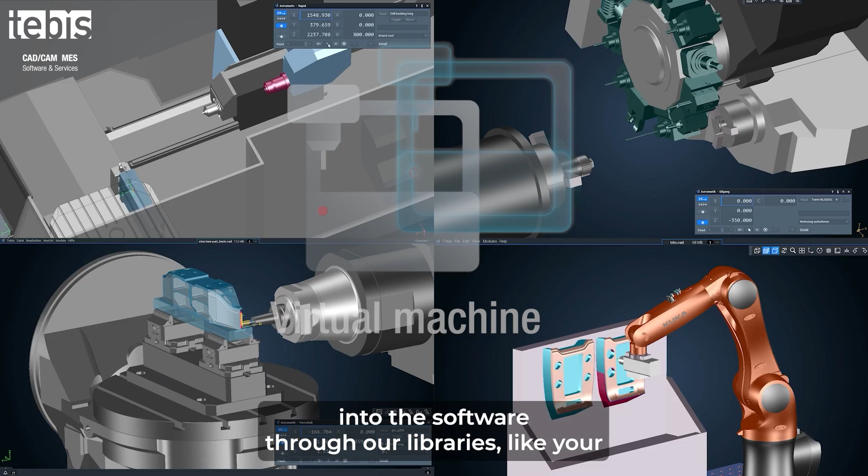Okay, so the digital twin, most people think of it as just being about machines. And of course this is a very big part of it, but it's also about the whole machining environment in Tebis, where we build in your working practices through our libraries, like your cutting tools with your speeds, feeds, ramping feed rates, plunging feed rates, step over feed rates, maybe recommended step overs, depths of cut, and your cooling. All this is built into the tool library. Could be your clamping devices, what machines you've got, even your processors for machining certain types of job through automation and templates.

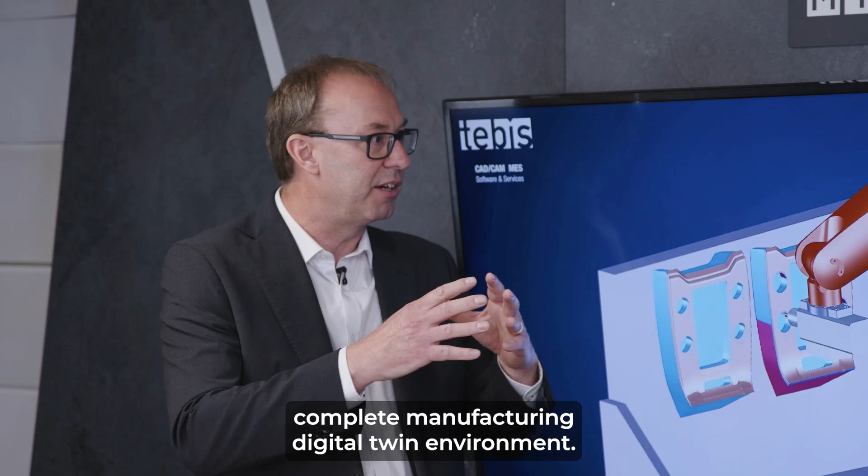All of these can be built into the software to give you that complete manufacturing digital twin environment. But of course today we're talking about the digital twin of the virtual machine. In Tebis, we're a machine-orientated program, and the virtual machine is a really important part of this process.

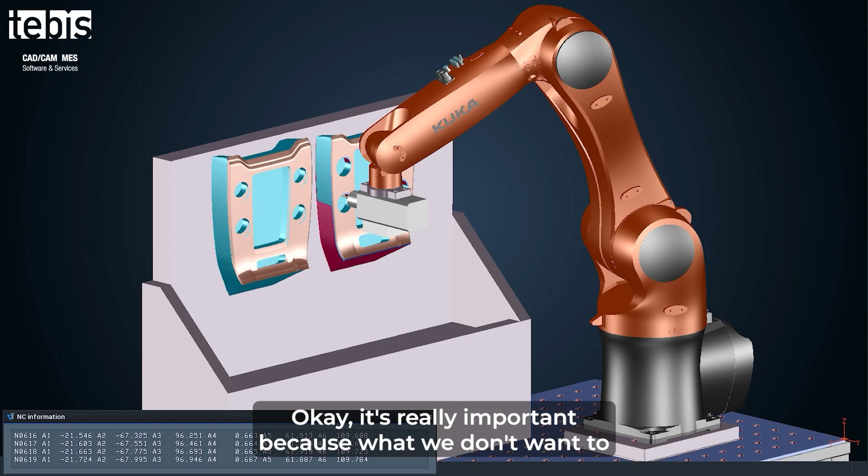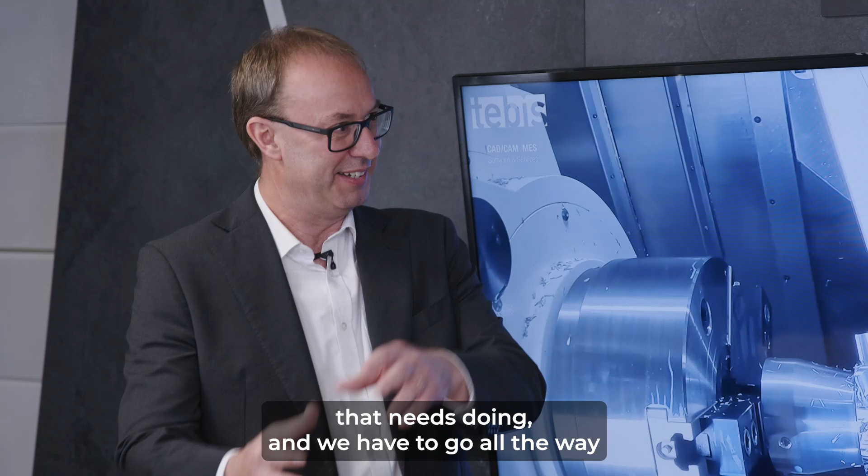So, Paul, why is all this so important? Okay, it's really important because what we don't want is a situation where we program a job and then find out afterwards that when I try to run this on the machine, the machine kinematics don't support the operation I'm doing. Or we find there's a rework loop that needs doing, and we have to go all the way back to the CAM side of things and restart it all again.

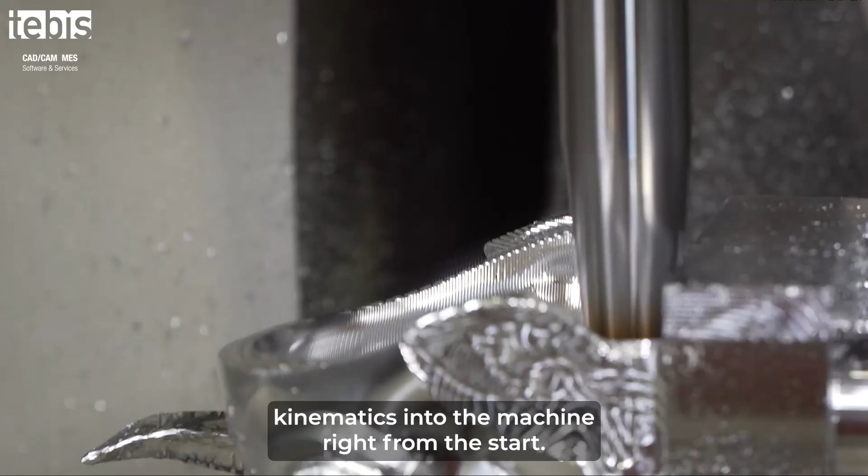Now with Tebis in the virtual machine, we build the kinematics into the machine right from the start, and you use this machine while you're programming. As I said, it's machine-orientated programming, so first we can choose the machine we're going to use. And if we've built all of the rotational limits into the machines, could even be the linear limits, basically the complete machine environment, then while I'm programming, I'm understanding from Tebis's feedback if I can actually achieve what I want to achieve through my programming process.

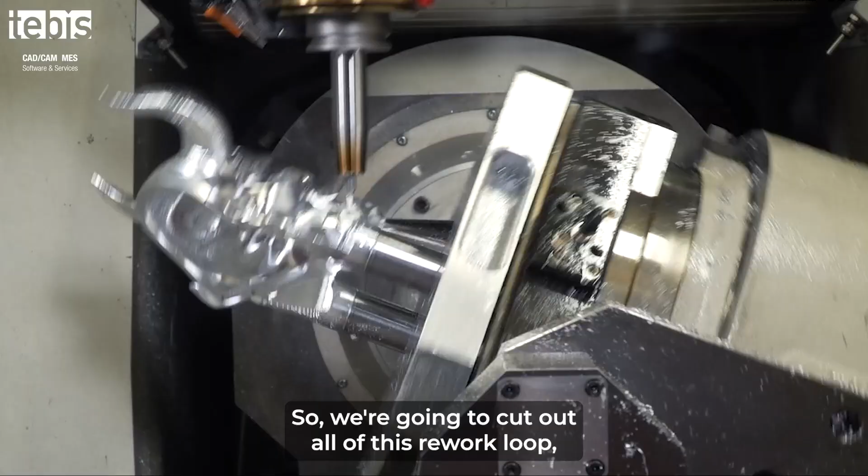So we're going to cut out all of this rework loop right from the start, and we know we've got good programs to send to the machine right from the moment we're doing the program. Because there's a lot of companies out there that have a programmer who's away from the machines, not always stood at the machine control. So if the machine control doesn't work because you're out of limits or something, it's going to be a ball ache going back and forth.

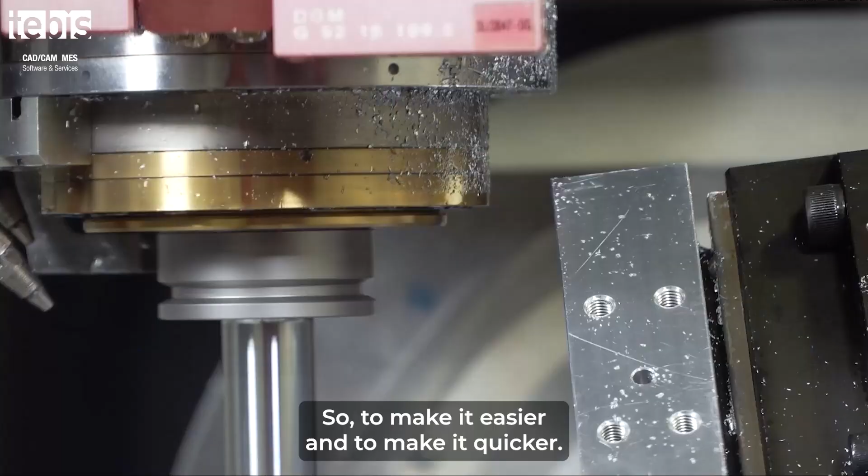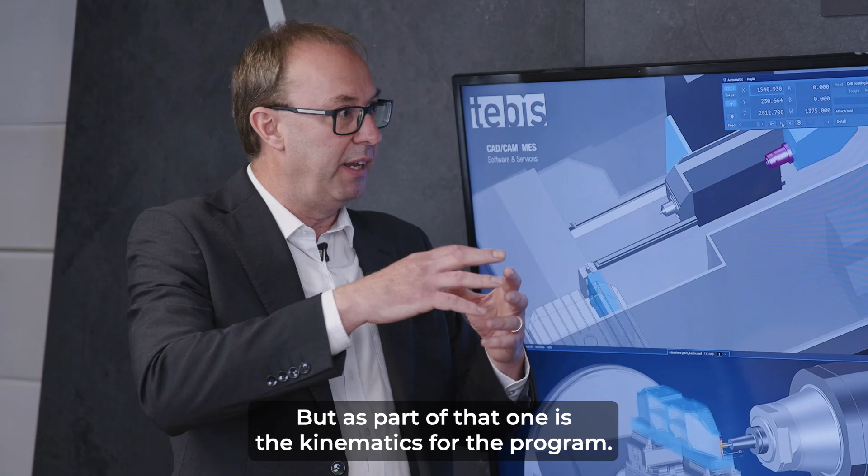So to make it easier and quicker, now let's talk about the virtual machine, because what's the importance and what's the benefits of using a virtual machine for machining parts? Okay, so to start with, it's about understanding the kinematics from the machine from the moment you start programming. But as part of that, one is the kinematics for the program, but the other is the safety of this. And the Tebis solution is scalable.

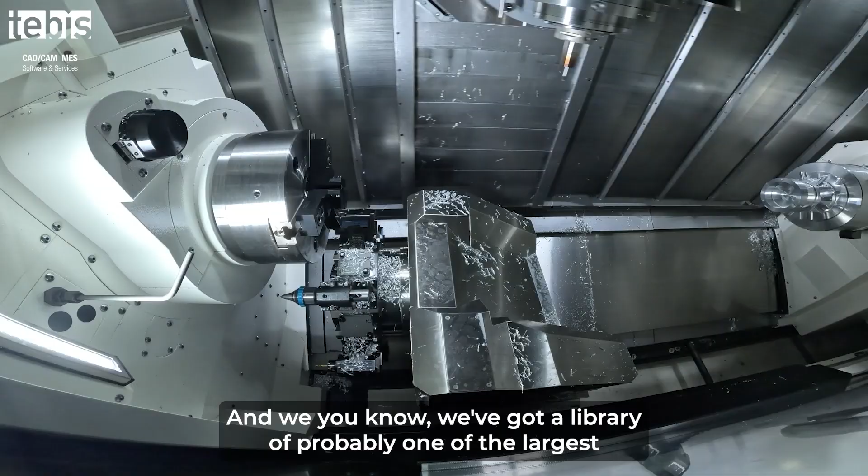So when you purchase a post-processor, you get a virtual machine with it. This could be from our entry level, which is a catalog machine, maybe close to your machine, off the shelf. We've got a library, probably one of the largest libraries of any CAM provider, of over 9,000 different machines. And this could be scaled up from that catalog machine to a fully verified machine, where we come in and perform a service of measurement on the machine.

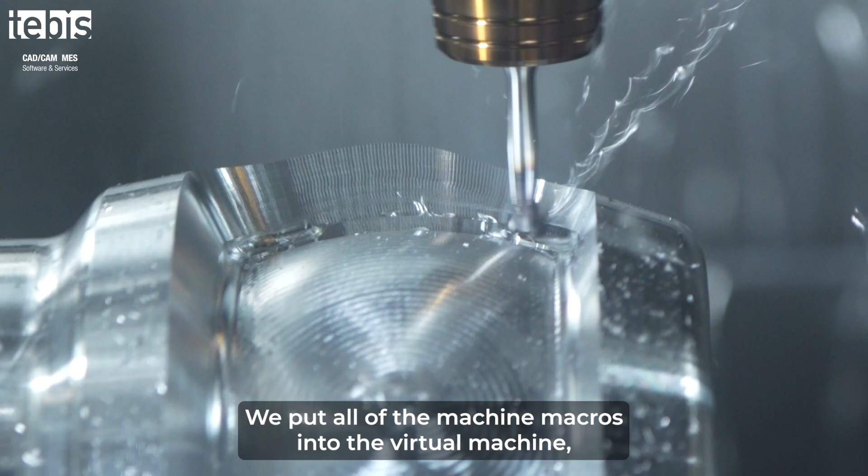We put all of the machine macros into the virtual machine, such as the tool change, a machine head change, maybe a particular macro that the customer has which he wants incorporated, which he likes to use. And we build all of these things in, like the look ahead of the machine, what the rapid rate is. So we're getting 95% accurate machining times as well from this at its highest level.

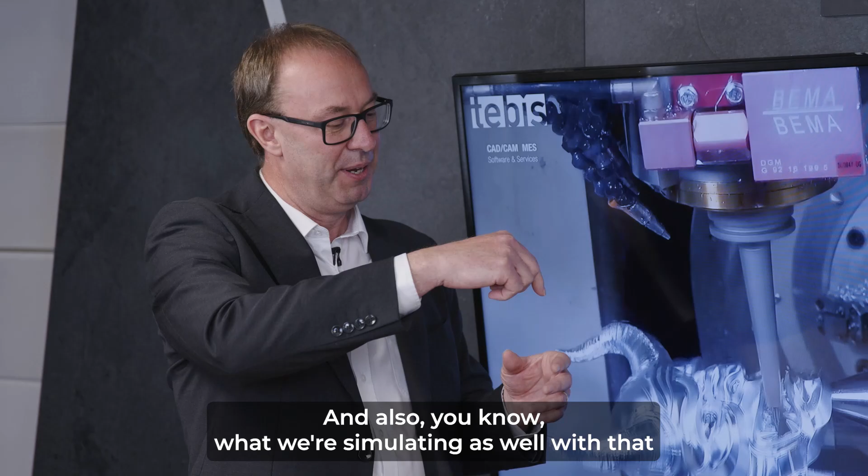And also what we're simulating with that is, as I said, the tool changes, the head changes, but it could be even the traverse from the end of one program to the start of the next. And this is really important for how we're getting around the job to avoid collision in between programs as well. So all of this is really important for safety and reducing any collision risk. To use a phrase, this is true simulation and not an animation.

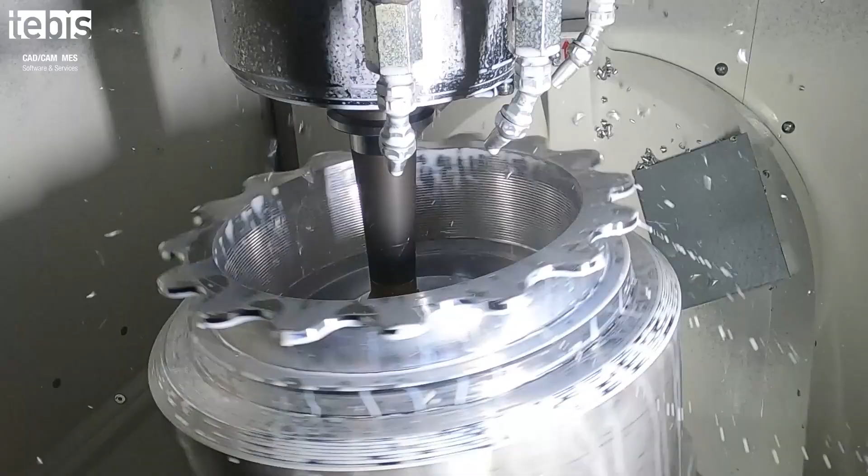We like that phrase. Thank you.

So we know that because of the kinematics built in, we're getting the right feedback of the machine. And what makes it different is we use the machine at 3 stages. One is at the planning stage. So we're setting the job up on the machine. Does it fit? Is the part too big for the machine, or where is the optimal position for the part on the machine? Can I get round it if I'm doing angular movements? Is the part clamped high enough? Where is the clamping device? So all of these things are important.

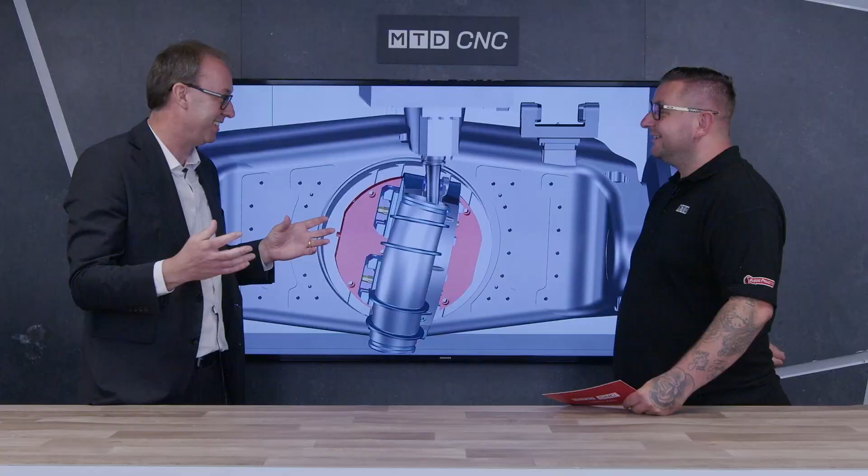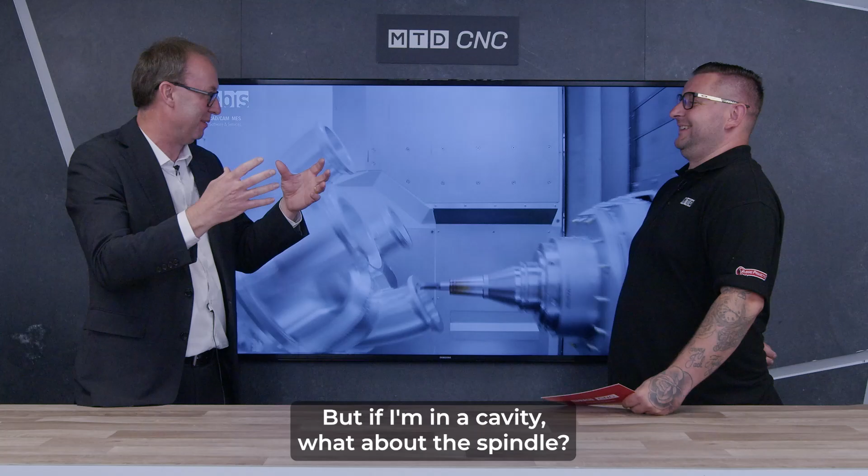And then we use it in the programming stage, as we talked about. In the programming stage we're understanding the kinematics of the machine, but also we're able to take into consideration, with our collision avoidance technology, even the machine head. I think this demonstrates it perfectly, as you can see here. And this is really important because most software takes into account the tool, the shank, maybe the tool holder. But if I'm in a cavity, what about the spindle? Yeah, so Tebis does this as well for you. And it's able to reduce the toolpath, employ a 5-axis movement to avoid a collision, to actually give us a good program.

And then we're using it for safety, a final collision check where we can check against the complete machine. And we can even do a dynamic check with this through the complete stock checking from start to finish of the part. And as I mentioned, get complete accurate machining times out.

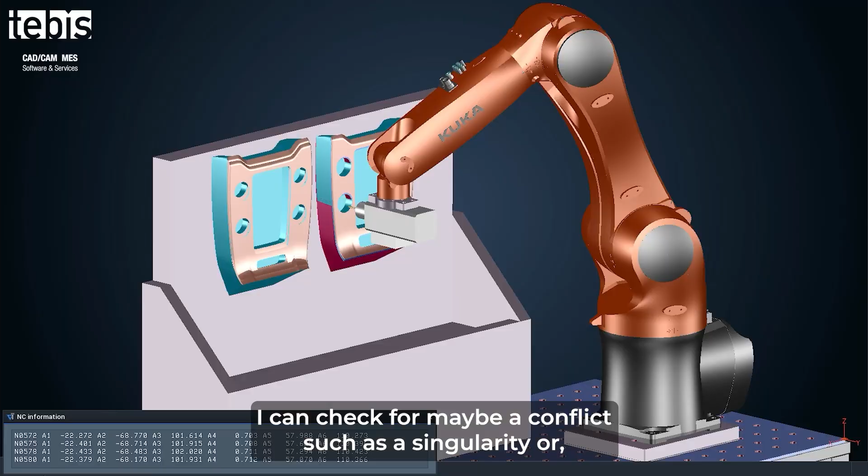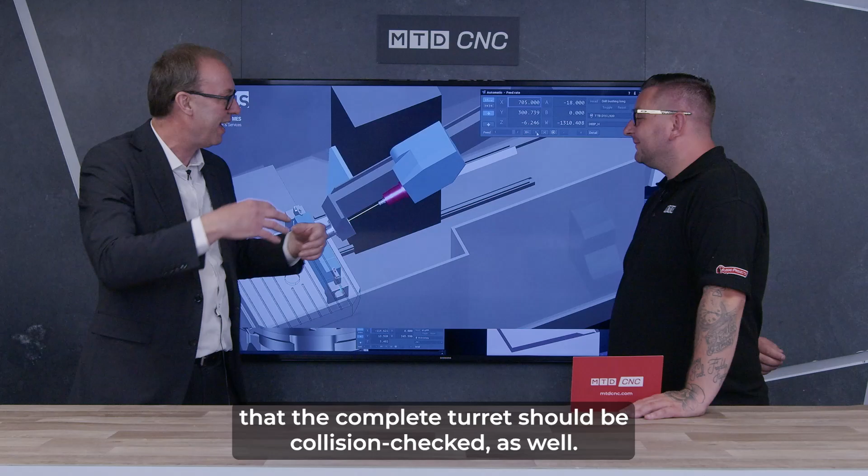And if we're using it, as you mentioned, for robots, I can check for a conflict such as a singularity, and use these robots for other niche activities such as polishing. Obviously we want the milling techniques like trimming, but polishing is something it could be used for. And also if we're looking at turning and turn mill, really complex machines, let's be honest, understanding the part transfer and having collision checking between this. As you saw there, the complete turret should be collision checked as well. And we can do all of this in Tebis, and we can support many, many machines by doing this.

So safety, collision checks, like you said, robots, not just the machine, not just the spindle, but the whole head. Yes. Part transfer, turrets, everything is in there to make sure when you press that green button, you are 100% confident that what you see on here is what you're going to get out the other side. Confidence, there's the word. That's what we want. People to be confident with their program when they put it out to the machine, and we're going to reduce those collision risks.